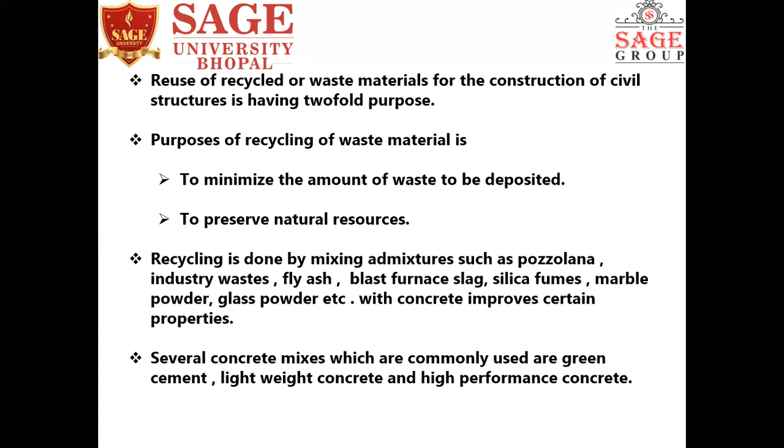Recycling is done by mixing admixtures such as pozzolana, industry wastes, fly ash, blast furnace slag, silica fumes, marble powder, glass powder, etc. with concrete to improve certain properties of concrete. Several concrete mixes which are commonly used, such as green cement, lightweight concrete and high performance concrete, are also produced by using recycled or waste materials.

Use of waste material in the construction industry reduces the consumption of Portland cement per unit volume of concrete. OPC has large energy utilization and thus an increase in the rate of global warming related with its manufacture, which may be decreased by substituting the cement partially with these waste products.

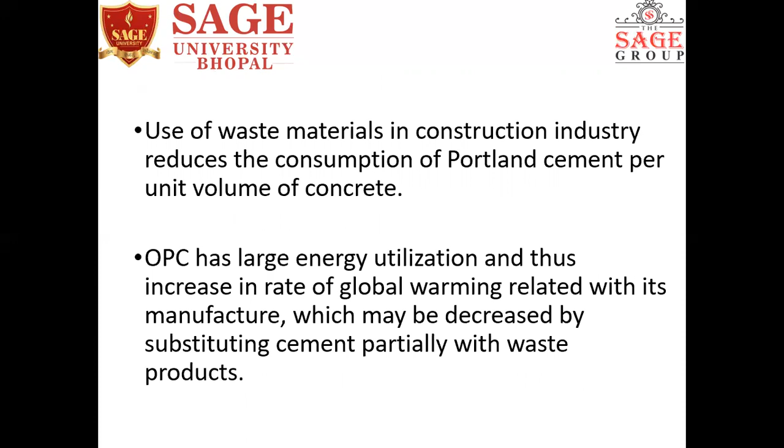Important reasons behind the increased use of supplementary materials in civil engineering are to reduce the consumption of cement by replacing the cement with materials having cementitious properties and to improve the properties of fresh and hardened concrete. But recently, several researchers produced high performance concrete by reducing the water cement ratio through the application of superplasticizers and ultra fine mineral admixtures.

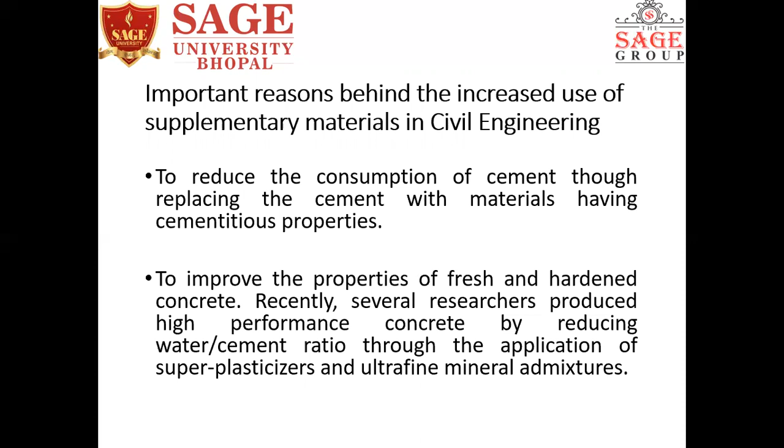Several researchers believed the following materials to be substitutes for cement, sand, or aggregate: fly ash, blast furnace slag, paper mill sludge ash, silica fume, bagasse ash, cement kiln dust, medical waste ash, waste glass powder, marble powder, natural pozzolana, textile reinforced concrete, and recycled concrete aggregates.

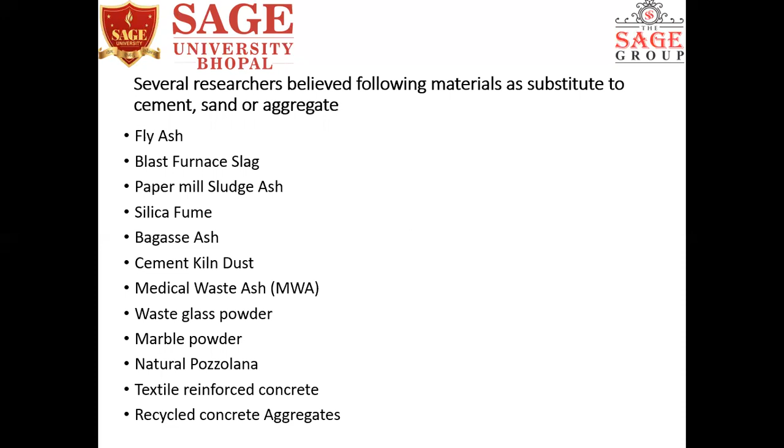Utilization of fly ash as a supplementary material reduces pollution, conserves natural resources and guards the environment. Fly ash lowers the water demand and improves concrete workability. Fly ash usually exhibits lesser bleeding and segregation. Fly ash generally reduces the permeability and absorption of concrete. Fly ash concrete has a lower heat of hydration, and fly ash is economical.

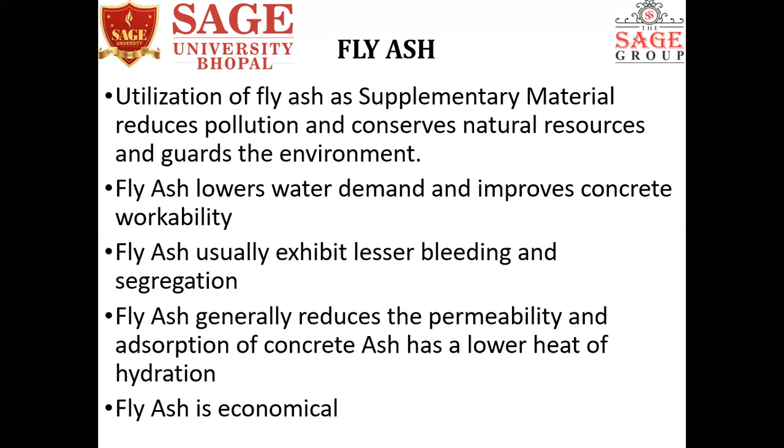Next is marble powder. Currently, huge amounts of marble dust are produced in natural stone processing plants with significant impact on the environment and human beings. Consumption of the marble dust helps to protect the surroundings. Marble waste is a solid waste material that can be used as a filler material in cement or as fine aggregate while preparing the concrete.

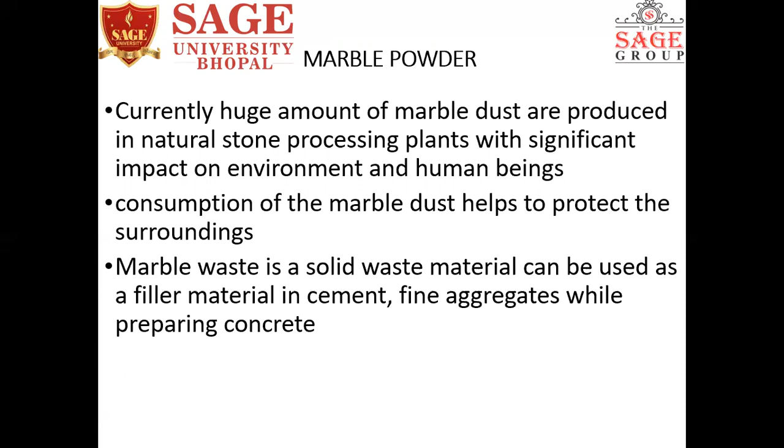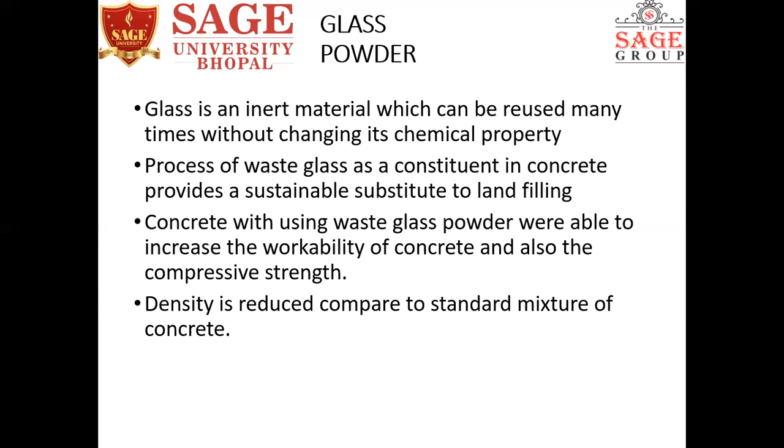Glass powder. Glass is an inert material which can be reused many times without changing its chemical property. Use of waste glass as a constituent in concrete provides a sustainable substitute to landfilling. Concrete using waste glass powder was able to increase the workability and also the compressive strength of concrete. Density is reduced compared to a standard concrete mixture.

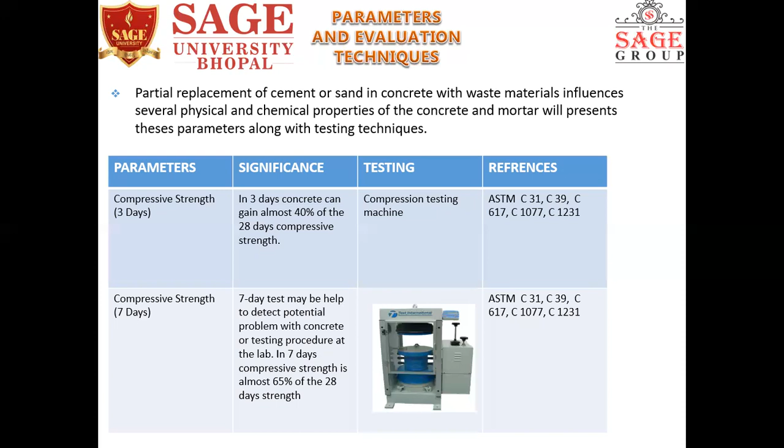In 3 days, concrete can gain almost 40% of the 28 days compressive strength. The 7-day test may help to detect potential problems with the concrete or the testing procedure at the lab. In 7 days, compressive strength is almost 65% of the 28 days strength. The 28 days compressive strength evaluates the quality and characteristics of concrete. Concrete mixes are recognized by their respective 28 days strength.

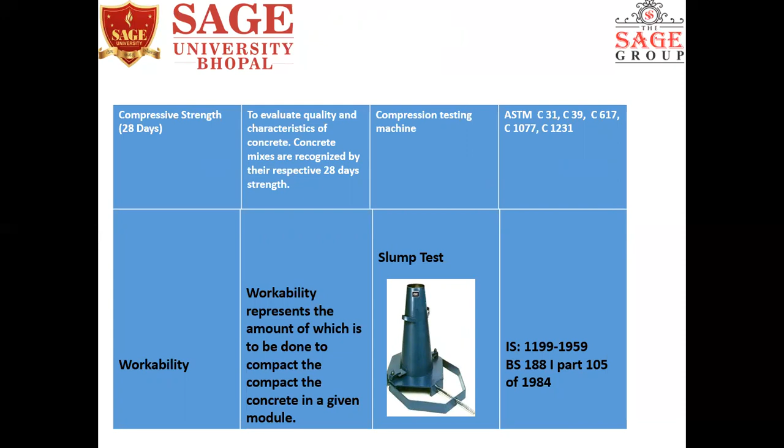Then the second parameter is workability. Workability represents the amount of work which is to be done to compact the concrete in a given mould. Now, first is the compression test: how to perform the compression test on concrete. Out of many tests applied to concrete, this is the most important, which gives an idea about all the characteristics of the concrete.

For the cube test, two types of specimen, either cubes of 15 cm by 15 cm by 15 cm or 10 cm by 10 cm by 10 cm, depending upon the size of aggregate, are used. For most works, cubical moulds of size 15 by 15 by 15 cm are commonly used. The concrete is poured in the mould and tamped properly so as not to have any voids. After 24 hours, these moulds are removed and the test specimens are put in water for curing.

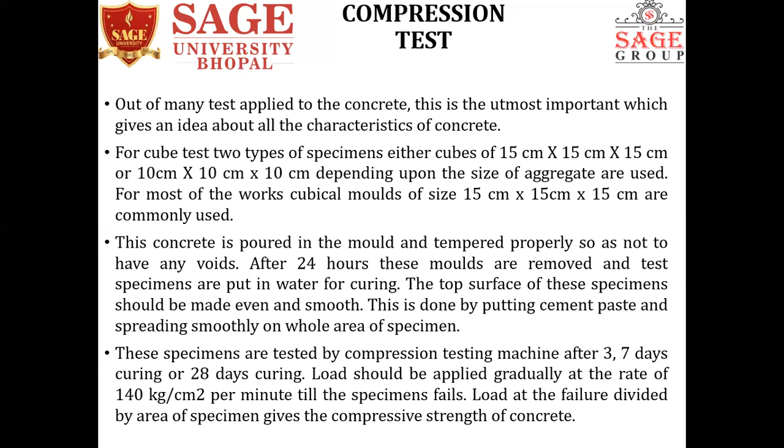The top surface of these specimens should be made even and smooth. This is done by putting cement paste and spreading it smoothly on the whole area of the specimen. These specimens are tested by compression testing machine after 3, 7 or 28 days of curing. Load should be applied gradually at the rate of 140 kg per square centimeter per minute till the specimen fails. Load at failure divided by the area of the specimen gives the compressive strength of the concrete. This is a compression testing machine and a specimen is being tested here.

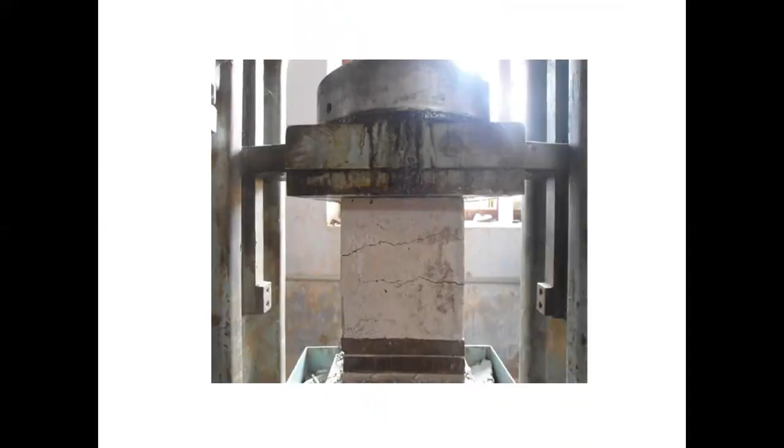Now, next is the slump cone test. Mix the dry constituents thoroughly to get a uniform color and then add water. Place the mixed concrete in the clean slump cone mould in 4 layers, each approximately 1/4 of the height of the mould. Tamp each layer 25 times with the tamping rod, distributing the strokes in a uniform manner over the cross section of the mould. For the second and subsequent layers, the tamping rod should penetrate into the underlying layer.

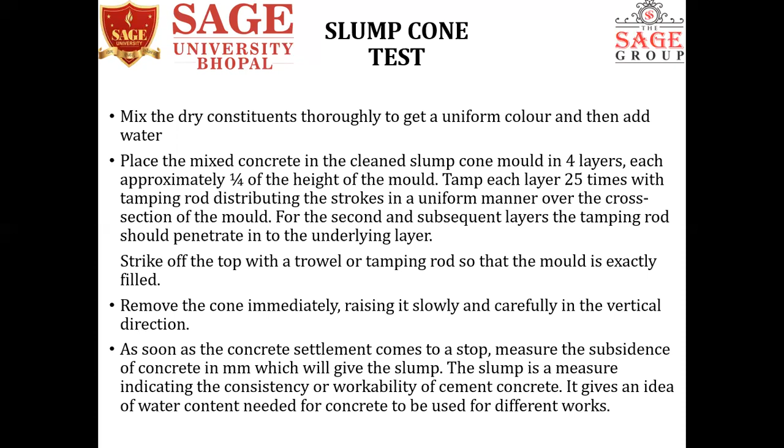Strike off the top with a trowel or tamping rod so the mould is exactly filled. Remove the cone immediately, raising it slowly and carefully in the vertical direction. As soon as the concrete settlement comes to a stop, measure the subsidence of the concrete in mm, which gives the value of the slump. The slump is a measure indicating the consistency or workability of cement concrete. It gives an idea of the water content needed for concrete to be used for different works. This is the slump cone apparatus and this is the concrete being tested for slump or workability.

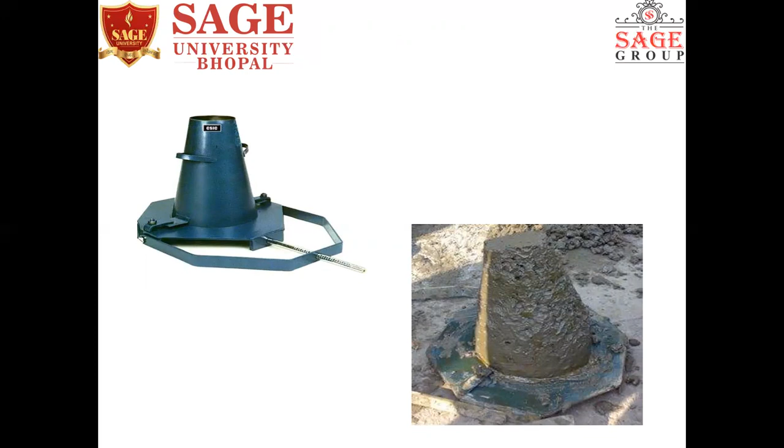Now, in this lecture, we have considered only 3 materials. In the next lectures, we will take up other materials also.